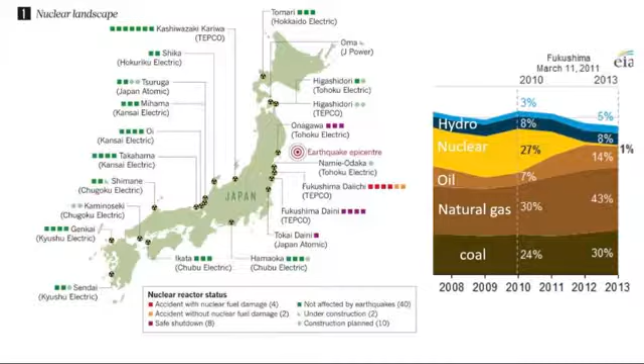First, what I'd like to do is talk to you a little bit about nuclear energy in Japan, just to sort of set the stage. So Japan has been heavily reliant before March 11, 2011 on nuclear energy. You can see from the chart on the right-hand side, they were getting almost 30% of their electricity from nuclear power before the earthquake and tsunamis that happened on that day.

And you can see on the left all of the plants and how they're positioned around the coast of Japan. And of course, they're positioned around the coast because they need to use the cooling water from the ocean. And many of these plants have, as you can count from the number of squares, a very large number of reactors. And so this is an economy of scale effort. Once you've built one plant, you have a lot of infrastructure there with one reactor. For example, in Kashiwazaki-Kariwa, they have 7 reactors at that particular plant.

So multiple reactors. This is a little unusual in the United States. We typically only have 1 or 2 reactors per plant. So this was their status at that time. And one of the things you can see is since that time, they've had to really increase their reliance on oil and natural gas and coal. And of course, there is coal in Hokkaido, but not much of it. And so almost all of these energy sources are imported. About 80% of the energy is imported into Japan, and this creates a significant issue for their balance of payments in the world.

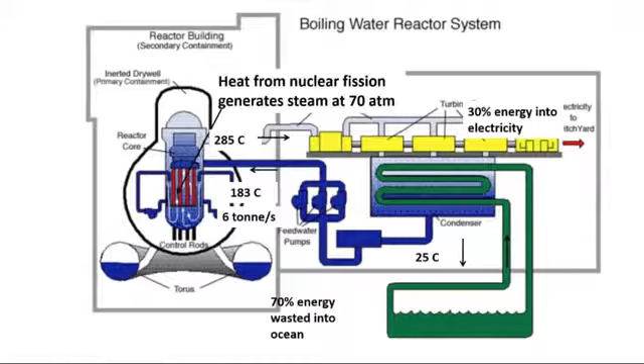Let's talk a little bit about nuclear power plants. They come in sort of 2 species. One's called a boiling water reactor and the other is called a pressurized water reactor. And the difference just has to do with how many heat exchangers you have between yourself and the nuclear fuel. The boiling water reactor was an effort to produce a simpler reactor than the pressurized water reactor that was first developed to power the nuclear submarines. And about 30% of the reactors in the world have this design.

And basically you have a core in which the nuclear reactions take place, and that generates steam at high pressure. That steam then is used to turn the turbines that turn the generators that make the electricity. Like any thermal power plant, if you just look at the Carnot efficiency of this, you'll find out that about 2/3 of the energy that's generated by the prime heat source, the nuclear fission, actually just goes into waste. And so it has to be dumped somewhere.

And this is a really important aspect, and one of the things that causes a great deal of difficulty in some cases. For example, if you're going to put it back into a river or an ocean, it raises the temperature near the exit, and that influences significantly the biota and the biology of the various marine life that's there.

So these things run on water. They use a huge amount of water. You can see that 6 tons of water a second have to go through this reactor, and then you have a very large amount of water that has to be circulated through that condenser.

Now, the reactors that were at Fukushima that caused so much difficulty were the boiling water reactors. They're referred to as a Mark I. That's because it was the first design that GE had developed in the late 50s and the 1960s. These reactors at Fukushima were built between 1970 and 1983. There's actually 6 reactors there, 4 of them of this Mark I design.

This Mark I design has a reactor pressure vessel that contains the nuclear fuel, and it has a large concrete structure, a reactor building around it. Inside of it is a light bulb-like shape, which is called the primary containment, and then they have a feature called a suppression pool, which is used to condense steam if you have some sort of release of steam. It also has the interesting feature that the spent fuel is stored in a large swimming pool that's located adjacent to the reactor, but isolated by very thick concrete walls up near the top of this building.

You can see in the little insert on the left-hand side there are 4 squarish rectangular buildings, the reactor buildings. The lower buildings to the front of that are actually where the turbine halls were, where the turbines and the generators were. And what you can see just down in the lower corner is the quay, because it's next to the Pacific Ocean there.

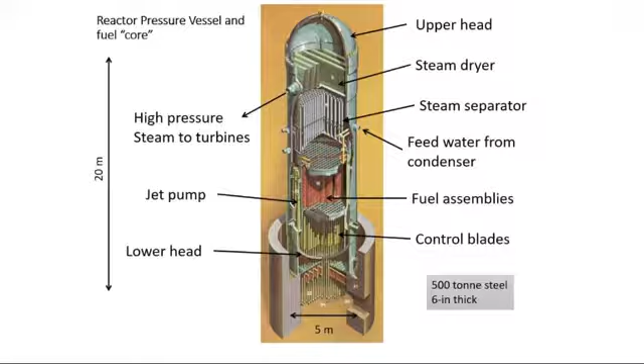So what makes this thing go? Well, it's really the fuel, which is located inside of this large pressure vessel, 6-inch thick, 500 tons of steel. In a boiling water reactor, the steam that comes out is what engineers call wet. That means that it's got some amount of droplets in it. You can't have droplets going in the turbine. They're bad for the blades. And so it has a steam separator and a steam dryer, so it's got a lot of equipment on the top of the pressure vessel. And for that reason, they have to put the control blades in the bottom.

The way you control the power output of one of these things is you have a set of control blades which are made out of boron carbide. Turns out boron is a very good neutron absorber. And when you push those control blades in between the fuel assemblies, you can basically turn off the chain reaction. Now, that doesn't turn off the heat generation, and that's important. We'll talk about that later on. You also actually have pumps inside of this reactor pressure vessel that are used to circulate the water around the core, this 6 tons a second. And there's additional pumps that are outside.

So this is the business end of it. If you have about 33 tons of partially enriched uranium, that is, it has about 3% U-235, and the rest of it is U-238, you can generate a gigawatt of electricity for a year. That's one of the real attractions of nuclear power plants, being able to use such a modest amount of material and generate a large amount of electricity.

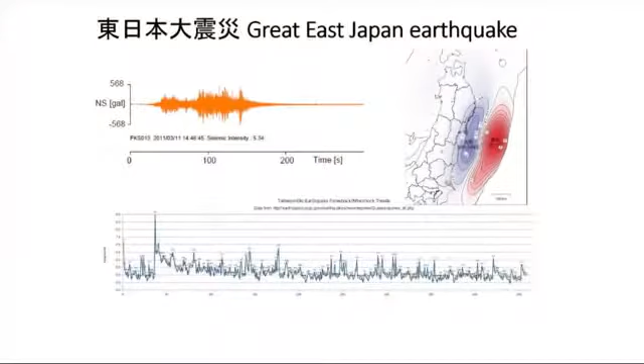What happened on March 11th, 2011? Well, they had a really terrible catastrophe there in Japan. They had an enormous earthquake. It's the largest earthquake recorded in the history of Japan, which goes back at least 1,000 years. This massive undersea thrust fault had 50 meters of slip, 7 meters of vertical motion, and a so-called moment magnitude 9. There have only been 4 other earthquakes of that size since 1900 in the world.

The shaking went on also for some time. If you look at the graph here at the bottom, I believe those are magnitudes of the shocks that took place afterwards. A very large number of aftershocks, and the shaking went on, as you can see up at the top, for probably 100 seconds. Then there was a very large permanent change in the elevation of the land, as you can see from the red and blue contours on the upper right-hand side. This was a tremendously destructive event.

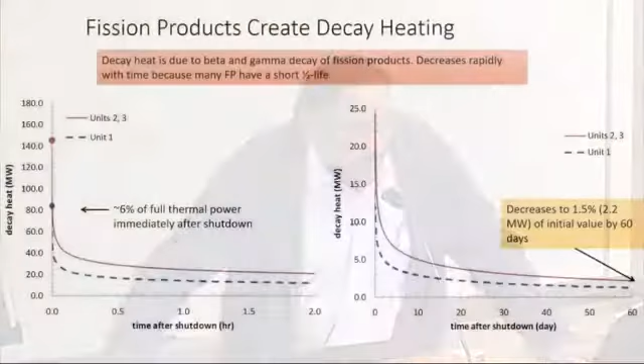So this is a sketch of what happens. It's a little more than a sketch; it's pretty quantitative. As soon as you shut the reactor down, you're still making about 6% of the full thermal power. These have a very large amount of thermal power, so 2 of the units were making almost 2,400 megawatts of thermal energy. So you're still getting 6% of that even after you put in the control blades.

And it takes many days, as you can see here on the right, 60 days to get down to about 1.5% of that. So you really have to wait quite some time, and during this period you have to actively cool the reactor. This is something that's very well understood and very well known, and it's something that was prepared for from the very outset.

In fact, the general design requirements that we have in the United States, that most countries have copied, require you to have multiple redundant means of keeping the electricity going and also keeping the cooling going. And so one of the primary things that you do right away, because loss of offsite power is something that actually occurs from time to time, even without natural disasters like this event on 3/11.

And they have a number of emergency diesel generators. These are very large generators. They had actually 13 of these at Fukushima Daiichi. So the emergency diesel generators come on. They also have very large banks of batteries. You can see some of the batteries here, and those batteries are a backup to the generators. These batteries power inverters that feed AC back into a separated power system.

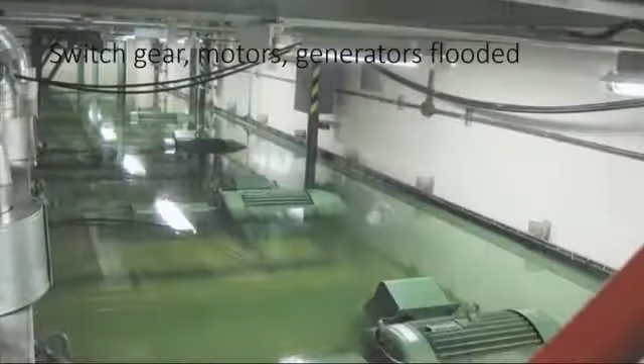And this water amount completely exceeded any of the previous expectations that they had. They were in the process of raising the height of the seawall, but they had never imagined that such a large tsunami would occur. The consequence of this was, yes? So even though the protection from tsunami was inadequate, I assume that it was on purpose that they built the reactors right next to the ocean.

Yes, unless you use a cooling tower system, almost all of not only nuclear power plants but thermal plants have to be built next to a large, what they call, ultimate heat sink. And it's got to be, output of the heat. That's right. That 70% of the energy that Carnot says you cannot use has to go somewhere. And so one of the ways you can do it is put it into the

atmosphere with cooling towers. That avoids having to be near a large body of water, but it takes a very large number of cooling towers, and usually it's a lake or a river or an ocean. In Japan, they use the oceans. Close proximity to the shore just to minimize pumping?

Yeah, so here's a very good point, because that's actually a deliberate choice they made. They actually cut the cliff down quite a bit to move the whole plant closer to the ocean. It was a bad choice in hindsight.

And I bet that's my phone going off, so I'm going to go silence it.

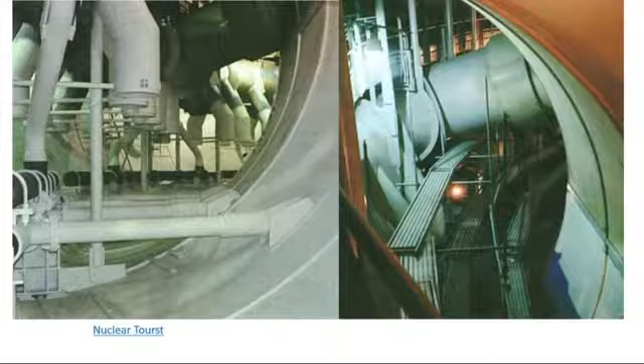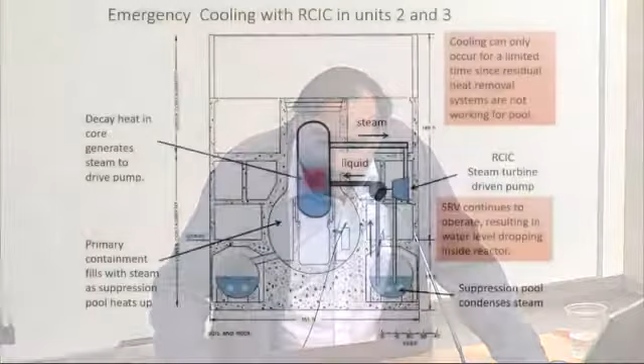The suppression pool is a very large torus. You can see some of the outside of it here, and you can see the piping networks that connect the suppression pool into the containment. So we have the suppression pools, we have the isolation condenser that didn't work, we have the reactor core isolation cooling system that was working but at an unknown amount because we don't have any instrumentation to tell what's going on.

You needed about 110 volts DC, and so you had to get a large number of batteries and string them together in series. They didn't have the equipment to do that, so they had to break into the maintenance sheds to find the equipment. So they went through some quite arduous efforts to try to just know what was going on. We wanted to know what was the water level, what was the pressures, what was the temperatures, and also ultimately they wanted to be able to actuate the valves to try to execute some mitigation actions.

One of the things that they did, and they had fire trucks there because they had a fire at this plant that was on the west coast of Japan, and they had a fire in 2007 after an earthquake, so they had put fire trucks at all of the plants, and they knew they could take those fire trucks and they could try to use these to pump water into the reactors, because as the water in the suppression pool is boiling off and the water level in the reactor is going down, they're getting very close to uncovering the fuel.

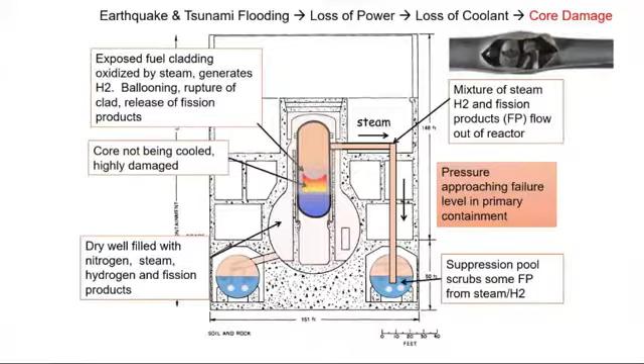So what's happening now, and it turns out it only took probably a matter of 6 to 8 hours for this to happen in Unit 1, and it took some longer time to happen in the other units, is that you've got this loss of power, you're boiling off the water, you're heating up the suppression pool, but ultimately the water level drops down below the top of the fuel. You're not able to remove the decay heat, and you wind up rupturing the fuel rods. That releases the fission products.

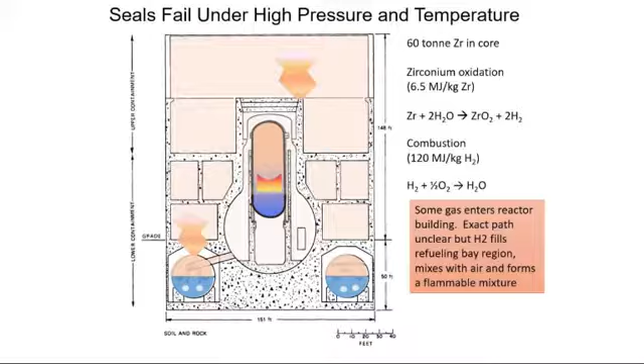The fission products then come out into the containment. And one of the things that also happens is that now you're getting very hot fuel and very hot zirconium, and that is going to react with the steam, and it makes hydrogen gas, and then that can go into the containment and combust. And so it's not clear precisely how the hydrogen got into the reactor buildings, but it filled this so-called refueling bay area, which is up at the top, and formed a flammable mixture.

Hydrogen is a very flammable gas. It has a very wide flammability range and very small ignition energy. And so the consequence of that was, as we know, that there were explosions. This is some footage from Fukushima TV.

There was a static TV camera there, and what you're going to see is over here next to this, the third from the right, tower, that was the explosion that took place in the top of Unit 1, and that generated a very large cloud of steam, and some of that is also concrete dust, because the panels, the structures that enclose the top of that bay were made out of concrete and steel.

Yes. But it turns out the radioactivity was released in the environment, both by these explosions, and also some of it just leaked out of various paths because as the reactors boiled off the water, they overheated. So the temperatures went up high enough to fail the seals, and the pressure went up high enough to actually lift some of the sealing surfaces, which are normally bolted in place. And so there are a number of leakage paths. The other thing that happens is once you have the explosions, then you don't have this containment of leakage.

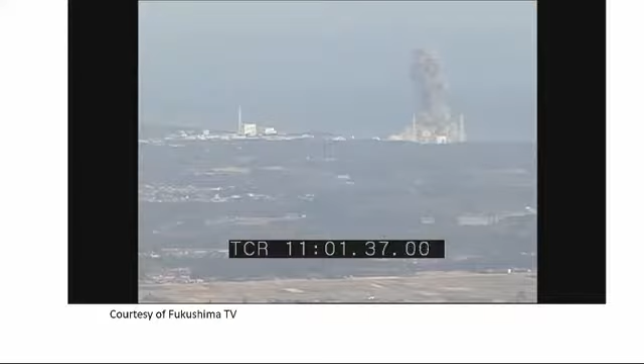This is the explosion of Unit 3. You can see it happens behind that second vent stack. Those vent stacks are about 300 feet high. They're about 100 meters, just for scale. So you can see this plume goes way up in the air. And if you look carefully, you can see some very large portions of debris.

Now, these explosions did not happen in the reactor. They happened in the reactor building. They destroyed structures that were above the reactor. They were not the reactors themselves. But what they did do was they created a very difficult environment to work. They tremendously frightened the operators and the other folks, the firefighters and the mechanics and people that were there.

It also created a fear that something much more dramatic even might happen here. It really created an extraordinarily difficult environment to work. And at one point they wound up evacuating many of the personnel because they weren't sure what was going to happen. They had a fourth explosion, which was not recorded on video. It happened early in the morning, and it happened in Unit 4. And that explosion happened apparently because some of the hydrogen from Unit 3 went into Unit 4.

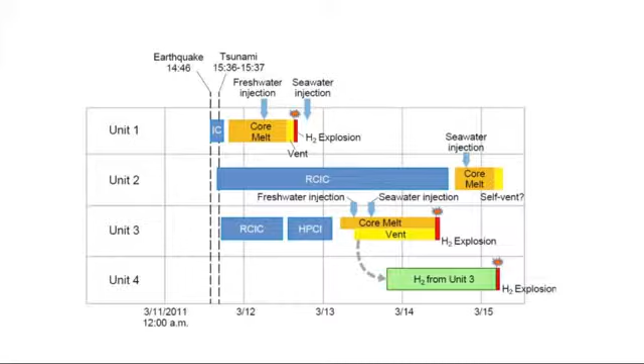This is sort of the timeline of what happened. It all really took place between about almost 3 o'clock in the afternoon on the 11th until sometime in the early morning on the 15th. They still grappled, of course, to bring this all under control for weeks and months and years afterwards, and are still doing that today. But this was a really dramatic period of time.

And you can see the timing of the operation of the cooling systems, the IC, up on the top in Unit 1; this passive system only operated for a short period of time. The core melted immediately, and then they had the hydrogen explosion. In Unit 2, the system actually operated for much longer than it was ever designed to, but ultimately that system failed. There was not an explosion there.

It's not really quite understood exactly what happened in Unit 2 in that regard, but in Unit 3, they had two systems that ran, and ultimately both of those systems were not operational anymore for various reasons. And after the core melted and they were unsuccessful at being able to vent the system to reduce the pressure, they had an explosion there, and then the hydrogen from Unit 3 went into Unit 4, and they had another explosion. So that's the history of what happened, and then here's the end result after an extraordinarily traumatic week.

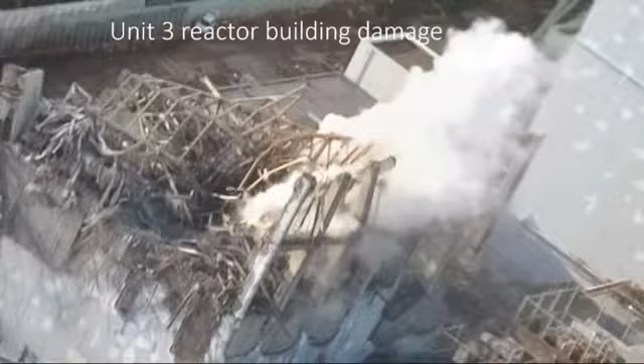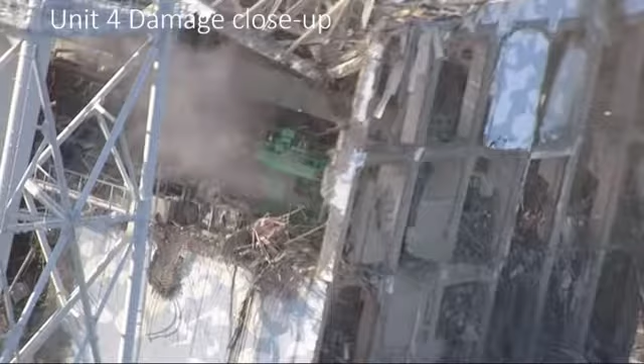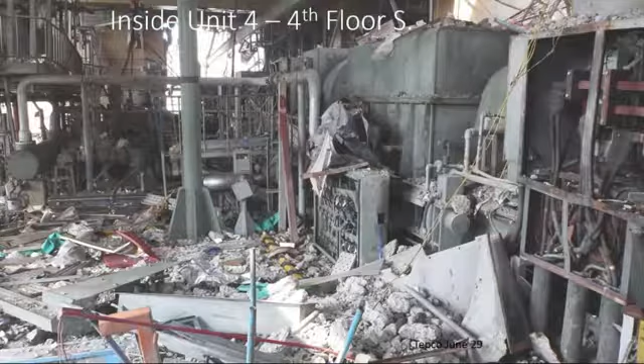This is a view of Unit 4, and this is a close-up, and that green piece of equipment you see there is part of the equipment that's used for moving around heavy things for the fuel handling, and this is an example of some of the damage you get from the explosion in Unit 4.

There was a great deal of concern, of course, and very rightfully so, about the extent of the contamination, and the Japanese responded, given the circumstances, in an extremely effective way. There were a lot of concerns that some towns were not evacuated as promptly as they should have been, but many people were. And there was a lot of screening that's taking place, and now they have a longitudinal study, and they're going to follow many of the members of the exposed population for the rest of their lives. And so they've ultimately taken this issue very seriously.

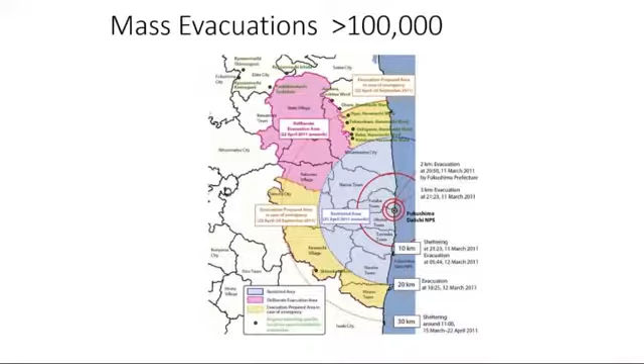Here's a picture of the contamination. North is up here, and you can see the area that's to the northwest through Namie and over to Iitate village, and that's the area that was very heavily contaminated, and where the evacuations took place. You can see there was a series of evacuations at different times. One of the criticisms is that this area that's in the red was evacuated much later than some of the earlier areas.

You can wash it off the houses. You can wash it off the concrete. But all you can do with the soil is bag it up. So there are huge mounds of bags of soil scattered around the Fukushima Prefecture. And now there's a big discussion about how they're going to dispose of that.

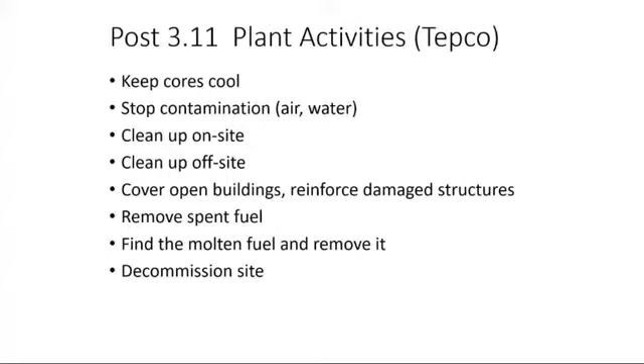So what do they have to do now? Well, they've got a lot of jobs to do. It's basically made TEPCO bankrupt. The government's had to step in and support a lot of this. The fuel is still in there with decay heat. You've got to keep it cool. You've got to pump water in there. It's just you don't know where it is anymore. You've got a lot of contamination.

You need to stop that. You need to close up the buildings. You need to figure out how the contamination is getting in the water. If you're going to try to actually remediate this site, which is their goal, you've got to clean it up on site. You've got to clean up from all of this contamination that's off site due to the rain out from the plumes. There's a lot of open structures, a lot of damaged structures.

You've got spent fuel, not only the molten fuel from the reactors themselves, but you've got the spent fuel that's in the spent fuel pools and the reactors. You've got to get that out and store that someplace else. And then ultimately their goal was to do what we did at Three Mile Island, which is to clean that up to the point where they can decommission the site and to some extent confine the heavily contaminated part to a very small area, and the rest of it will be usable.

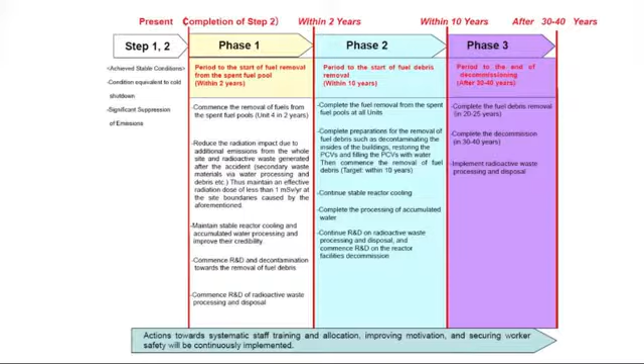It's a really daunting task. In fact, they're thinking this is basically going to be lifetime employment for everybody that's working on it. It's probably going to take them, they think, 40 years. It could take even longer. Three Mile Island was a walk in the park compared to this, and it took us about 14 or 15 years to get it completely decommissioned.

And to compare it with Chernobyl, they just walled off the town and said, yeah, there's Chernobyl. In some sense, there's no comparison. At Chernobyl they entombed the reactor, but they also never really effectively decontaminated the area. They just basically made it a preserve. And you can go there as a nuclear tourist. I'm not enthusiastic about that, but it's possible to go there.

The Daiichi plant, one of the more advanced? It wasn't like an old design, it was pretty modern. No, it was one of the first plants they built. In fact, Unit 1 was the first plant they built in Japan. And those Mark 1s are the first generation of reactors. It's Generation 1. They have some Mark 2s that are up the way. They have very few Gen 3 plants in Japan.

The original one was built in the 50s by GE? No, 1970 was when it started. They were building it in the 1960s. It took them probably about 5 years to build it. But the design was done by GE. It was a GE design, and GE built the first one. The subsequent ones were built by Toshiba and Hitachi, depending on who built it. GE also built a couple of the other ones.

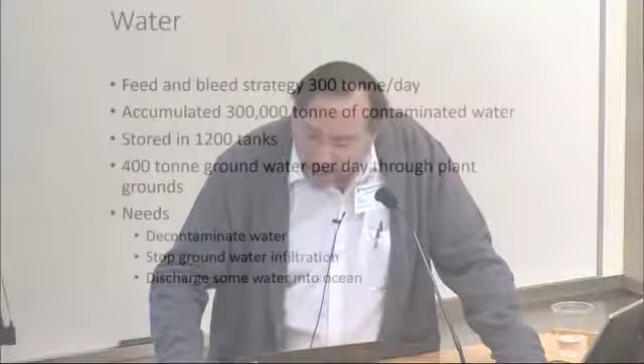Now, I want to say a few things about water. It takes water to keep these things cool, and we've talked about that extensively. But even after the fuel is all molten and we don't even know where it is, we still need to make sure we keep it cool.

And so what they've been doing is basically pumping water into the reactor. It goes somewhere, hopefully around the fuel, and then we pump it back out of the bottom of the building. Now, what's happening, though, is something that, in hindsight, is perfectly reasonable, but was unexpected at the time. This was built on an alluvial floodplain. There's a very large underground river of water that comes down from the mountains there in Fukushima.

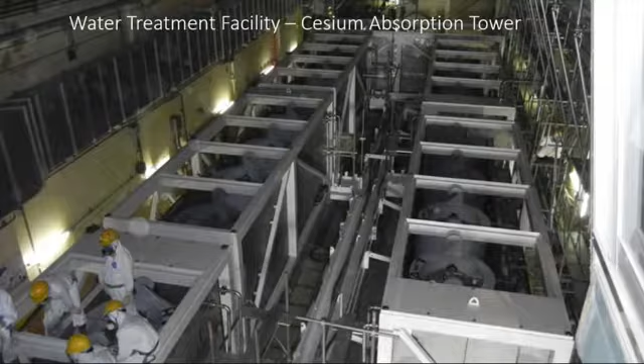They're going to have to release it back into the Pacific, and that's going to cause a lot of consternation in the international community. But they're just going to run out of space to put it. It's just not physically possible to do that. And one of the real difficulties is to get out all the cesium, of course, and then there's other things that are even harder to get out. For example, there really is no effective technological way to remove tritium.

And so the tritium is essentially something that we have no way to chemically separate at this kind of scale. And so you're just stuck with the tritium. And so the water will be contaminated with tritium when they release it. But you can likely get out the cesium and the strontium and some of the other bad actors. There's some of the treated water and where it's stored.

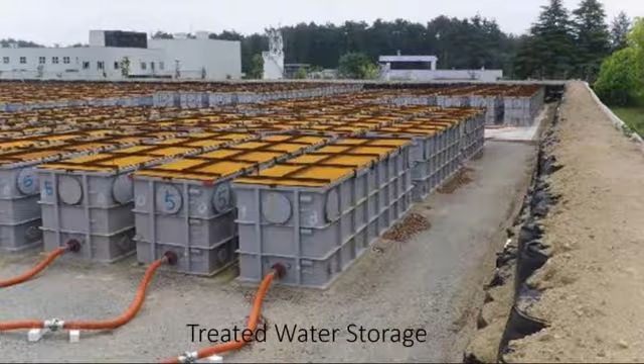Finally, imagining that they'll get all of these things under control, they'll clean up all the rubble. They've done a good job on that. They'll be able to figure out how to handle the water, and then they'll be able to go in there, find the molten fuel, and take it out.

Now, what they had to do at Three Mile Island is, you know, imagine this is a refractory material, right? This is a very high melting point oxidic material, and you have to use a diamond drill bit and go in there and basically drill it out. But you've got to find it before you can do that. That's what we did at Three Mile Island. So there, in the process, they have a large research effort, first of all, to find it using robotics.

One of the challenges is if you put your little camera down there, you'll find that the radiation field pretty quickly causes the pixels to start to go white, and then it all dies. And so your robotics don't live for very long. You can't use robotics which are radio operated. They have to have a tether, because you cannot get your radio waves through all the steel that's in the concrete and in the structure. So there's some real challenges there.

But there's a lot of people that are working feverishly on trying to do this. And just the other day, they managed to get a robot down into the bottom of one of the units, and sure enough, they saw some black crud down there that they think is part of the core. And so they're beginning to find out where the stuff is.

And, you know, one of the things they've also tried to do is they have some simulation programs, and they've tried to figure out where did it all go. They think in Unit 1 it all ran down to the bottom and ran out through the openings and went down onto the floor, and they're not really sure where it is in Units 2 and 3, but there's various possible things that could have happened.

So they had a lot of spent fuel there, and they made a lot of efforts to get the spent fuel out. Spent fuel is in these swimming pools that are next to the reactors. They've also got a large common pool that they use to store it in. And there's an enormous amount of radioactivity in these spent fuel pools, and this is something that's of concern in the United States. We have the same situation in the United States. We don't have a geologic repository, so we're continuing to store the fuel. Some of it has been put into what's called dry cask storage, but much of it is in the pools that are next to the reactors.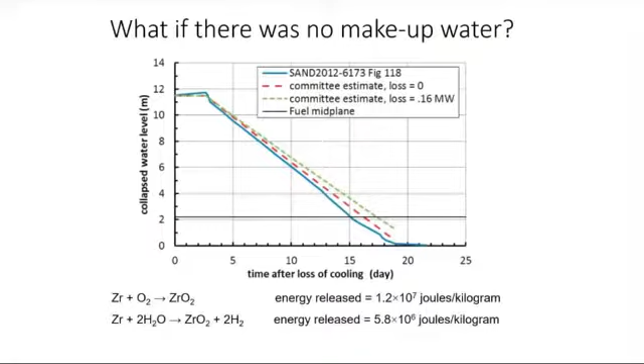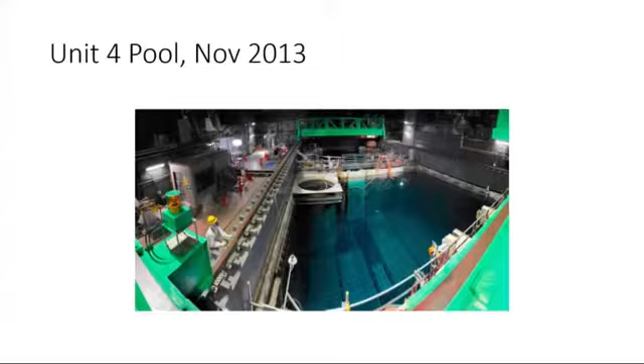If you don't keep the pools full of water, this is a Unit 4 pool, it would have boiled off in about 16 days. And if it boils off, the same thing will happen as happens in the reactor. You'll eventually start oxidizing the zirconium. It'll heat up. You can either burn it in air or you can burn it in steam. And none of these things are good. This is a very bad day. And so it's important to keep these pools filled and cooled. And this is an example of what they had to do.

They built a complete superstructure around Unit 4 and built a whole new system cantilevered over the damaged reactor building. It's completely independent, has more steel in it than the Tokyo Tower, in order to pull the spent fuel out and transfer it into casks. And then they took those casks over and they transferred it into the other pools that were not damaged in Units 5 and 6, and also the common pool.

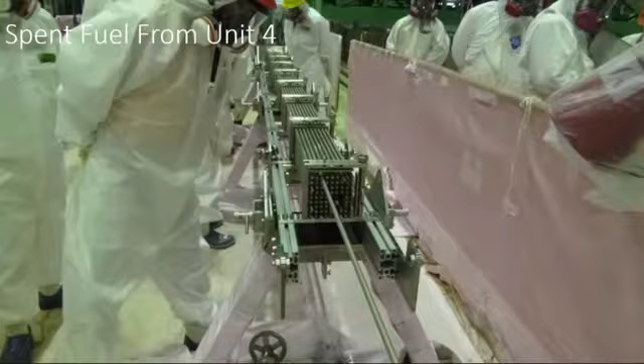So this is an example of what one of these fuel assemblies looks like. It's a set of these 12-foot long zirconium tubes that are about as big around as your little finger, and inside of them are the pellets of uranium dioxide. And what was really remarkable is all of these things appeared to have survived unscathed, even though in some cases a lot of debris, particularly in Unit 3, fell into the pool. In fact, the whole multi-ton fuel handling machine fell into that pool.

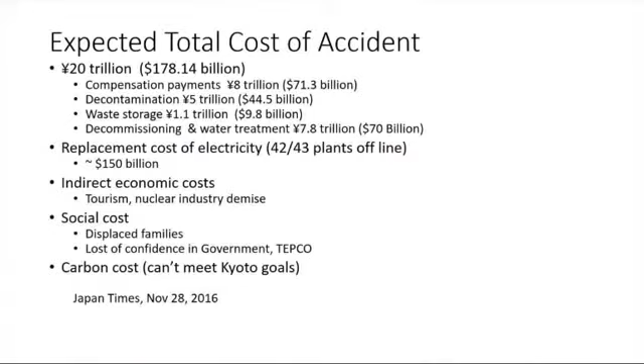So what are some of the lessons for us? I'm going to finish up here. It's a very expensive business to have one of these things happen. The direct cost to Japan, they're now thinking around the order of probably $180 billion. How you actually calculate that is something that is in some dispute, but you can see all the things that go into that, and these are just projected. They still got a long way to go before they're able to do some of these things like decommissioning.

They had to buy a lot of electricity. Remember, they were making almost 30% of their electricity from nuclear power. And so the replacement cost of the electricity is very substantial. It's almost as much at this point as they expect that accident to cost them. There are indirect economic costs that have to do with the fact that it really substantially affected tourism, the livelihoods of the fishermen that are there on that coast. There's a very big social cost to the families that were displaced.

And there's been a tremendous loss of confidence in the government and in TEPCO and in the so-called nuclear village in Japan, which was a very substantial part of the plans for Japan to meet the Kyoto goals in terms of their carbon output. They are now trying to understand how it's going to be possible to meet the goals. They were planning to ramp up and increase the number of nuclear power plants and actually go to probably something like 60 or 70% at least nuclear power for generating electricity.